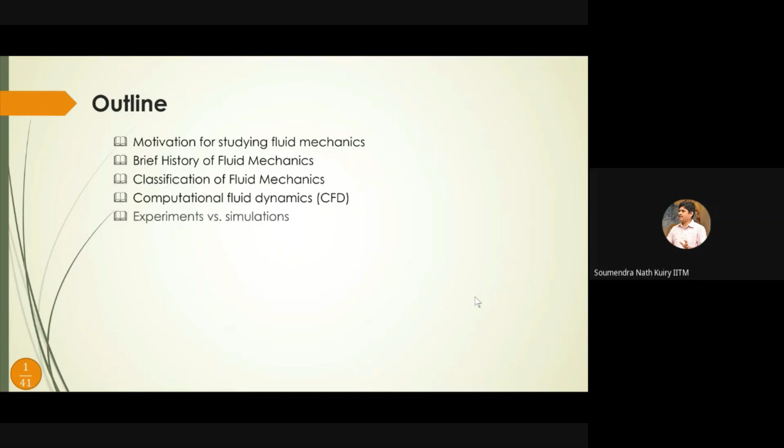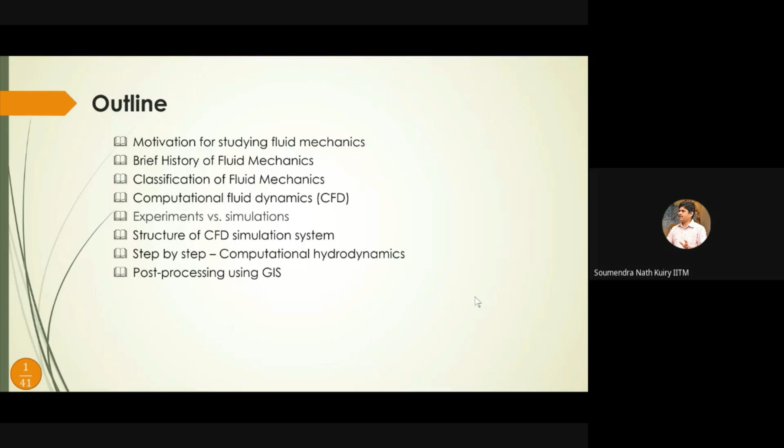So now the brief outline of the topic. I'll go for very basic things: why you should learn fluid mechanics, then what is the history of fluid mechanics, then what is the classification of fluid mechanics, then what is computational fluid dynamics, that means solving fluid mechanics problems with the help of a computer. Then I'll compare experiments versus simulations. Then what is the structure of a CFD simulation system. Then I will try to explain step by step the procedure for computational hydrodynamics, because CFD is a term more suitable for mechanical engineering and aerospace engineering. I think in our case, in civil engineering or hydraulics, it can be called computational hydrodynamics or just hydrodynamics. Then post-processing using GIS just to visualize and analyze the results.

So now, what is the motivation for studying fluid mechanics? I hope all of you have gone through a fluid mechanics course at your BTech level, and some of you have gone through an advanced course during your master's degree. Fluid mechanics is omnipresent, meaning this subject is available in aerodynamics, bioengineering, mechanical systems like combustion, energy generation, geology, hydraulics and hydrology, meteorology, ocean and coastal engineering, water resources engineering, and numerous other examples. In my talk, I will try to cover hydraulics, hydrology, meteorology, and ocean and coastal engineering.

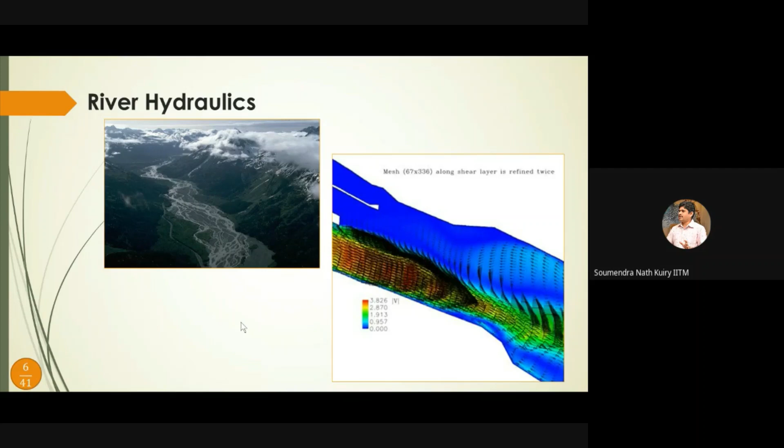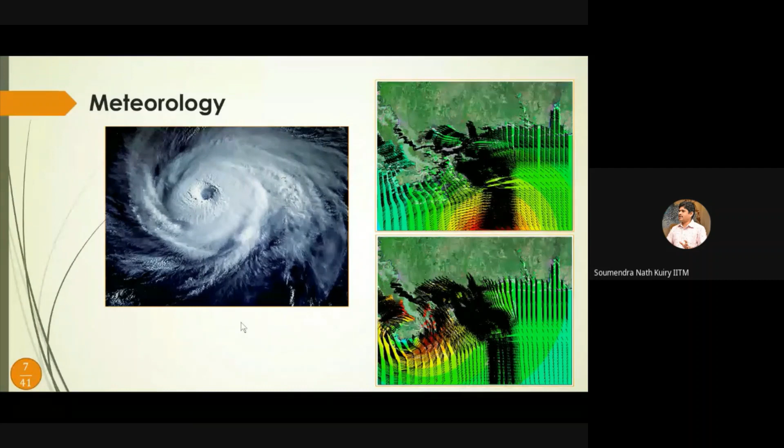So in case of river hydraulics, we focus on simulating flow, it may be in a river system or stream system, or flow in an open channel or any other channel, it can even be lab flume flow. Then in case of meteorology, we can start from atmospheric modeling, then go for rainfall modeling, then rainfall-runoff modeling or hydrologic modeling, then hydraulic modeling, and then hydrodynamic modeling, that means the ocean side. Of course it can also be tsunami simulation.

So now, out of this entire fluid mechanics field, in civil engineering we deal with liquid only, because fluid means liquid, gas and plasma. We focus on liquid flow, and that too water. So fluid mechanics can broadly be classified into two groups: hydrodynamics and gas dynamics. Okay, let me give you the pointer.

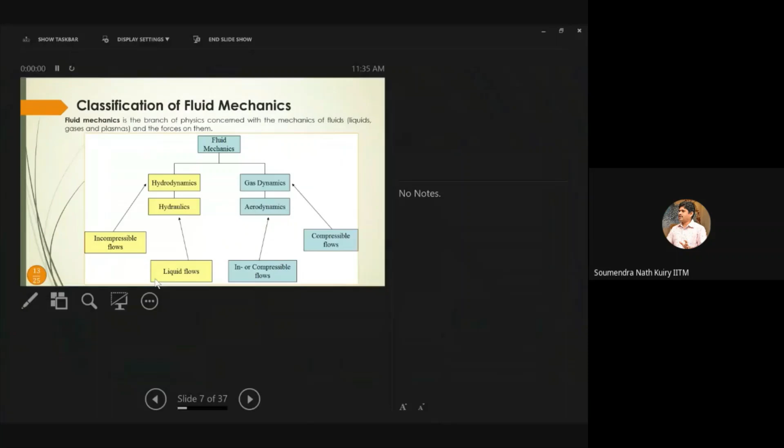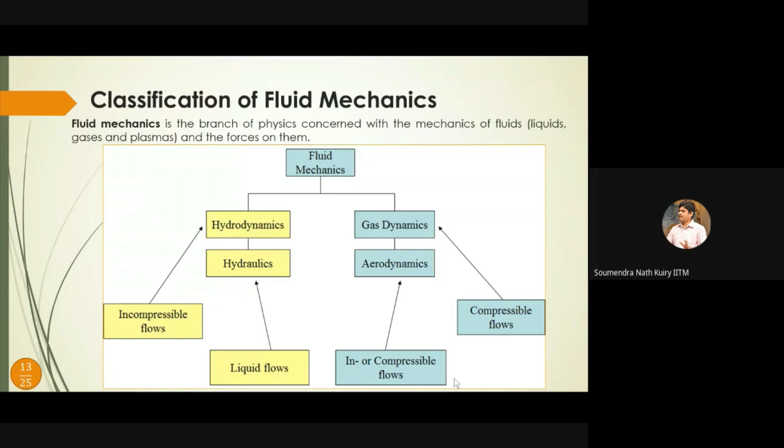So in hydrodynamics, it is like hydraulics and it is incompressible flow. In case of gas dynamics, it is aerodynamics, which can be incompressible or compressible flow. Now, out of that, we will focus on hydrodynamics.

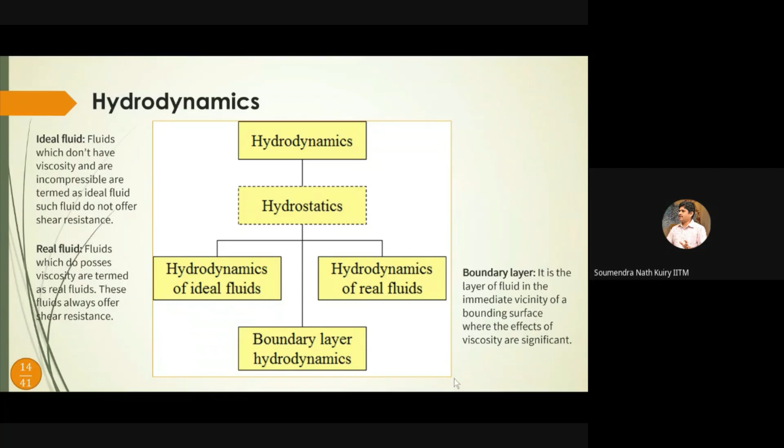In hydrodynamics, one aspect is hydrostatics, that means when the fluid is not moving, and then we can discuss hydrodynamics for ideal fluids and real fluids. There is one more topic which is very important, boundary layer hydrodynamics. So we have fluid, out of fluid we are talking about liquid. Then we can discuss hydrostatics and hydrodynamics of ideal and real fluids. Boundary layer is important in civil engineering, but it is very, very important in aerospace and mechanical engineering.

Now, when we talk about numerical modeling or modeling of any fluid flow, what should be the approach? There are three approaches: experimental study, theoretical study, and computational study. Experimental hydraulics, if you look at the early days, maybe before the 80s, mostly we were relying on experimental hydraulics. Of course, theoretical study has been developing since long back, but there is huge development when computers came into this area, and many numerical schemes were developed. Now we can solve fluid mechanics problems with the help of computational methods.

So in earlier days, we used to prepare a model, that means a replica of a prototype, and then we used to study it, and whatever results we got from that dimensional and model analysis, we would go back to the prototype system so that we could understand the prototype.

But nowadays, for many fluid flow situations, we can use numerical models. It can be 3D, 2D, or 1D. And it can be for different types of flow regimes, like subcritical flow, supercritical flow, or transcritical flow. Transcritical means the flow can be mixed, both subcritical and supercritical can be there.

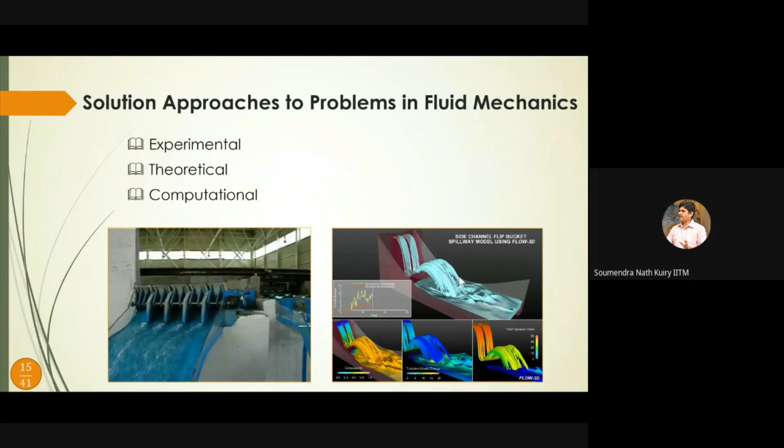Now, if we want to focus on computational fluid dynamics, I'm trying to merge slowly with hydrodynamics. So I'll start from computational fluid dynamics, then merge to hydrodynamics. So what are the basic concepts of computational fluid dynamics? CFD is a branch of fluid mechanics, and it uses numerical methods and algorithms to solve some fluid related problems.

So what we do is, whatever numerical methods are there, we use a computer to solve the fluid flow problems numerically. Now the term simulation is used to indicate that we use the computer to solve numerically the laws that govern the movement of fluids. I hope all of you know the laws like conservation of mass, momentum, and energy. So all these equations we solve for simulating fluid flow problems.

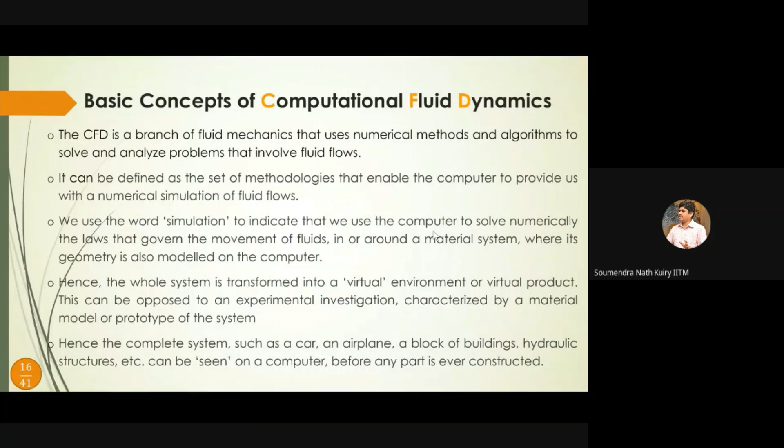That means the whole system is transformed into a virtual environment, that means we conduct numerical experiments in a computer instead of in a physical setup.

Now, what are the ideas behind numerical methods? When we talk about any physical process, whether it is flow in a channel, or a dam break flow, or tsunami wave propagation, whatever it be, every physical process follows some set of rules. These rules may be defined by a set of mathematical equations. These equations are generally differential equations, and most of the time these equations are highly nonlinear, so analytical or exact solutions may not be possible.

This is why we use numerical methods to solve these equations approximately. Please remember, when we use numerical methods, we solve the equations approximately. So rules are there, all the physical processes follow certain rules. We are defining the rules with the help of mathematical equations. These equations are partial differential equations, and they are solved with the help of numerical methods in a computer.

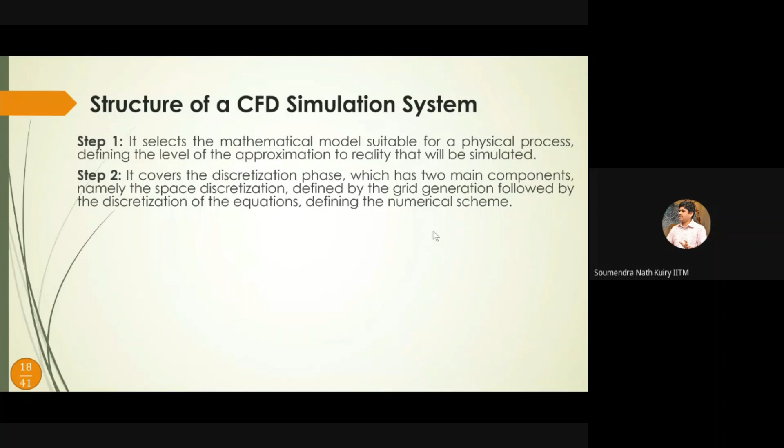When we talk about, let's say, flow, like river flow, that means there is a river bed and water is flowing. So at least one medium is there, that is a river bed. Now in reality, this river bed is a continuous surface. Now the computer will not understand it directly. So we try to define this bed or river topography by some points. That means the points should be described by X, Y, and Z. That means XY coordinate and what is the elevation with respect to datum.

Now, if we supply so many points so that the entire geometry can be defined, then it is called space discretization. So this space discretization, that means to represent the space with the help of some finite number of points, we call it grids. When we connect these points, they are not arbitrary. Of course, the points will be connected with some sequence. Then we define a grid. Digital elevation model - this will represent a regular grid. Okay, so in the first step, we discretize the space.

And in the second step, we discretize the equations, because they are partial differential equations. So we cannot solve them directly. So we take the help of numerical methods to transform the partial differential equations into difference equations. That means in the algebraic form of the equations. Now, once it is in algebraic form, that means your operations are very simple, like addition, subtraction, division. So computer can do it very easily. So we have space discretization, then we have discretization of the equations. That is step 2.

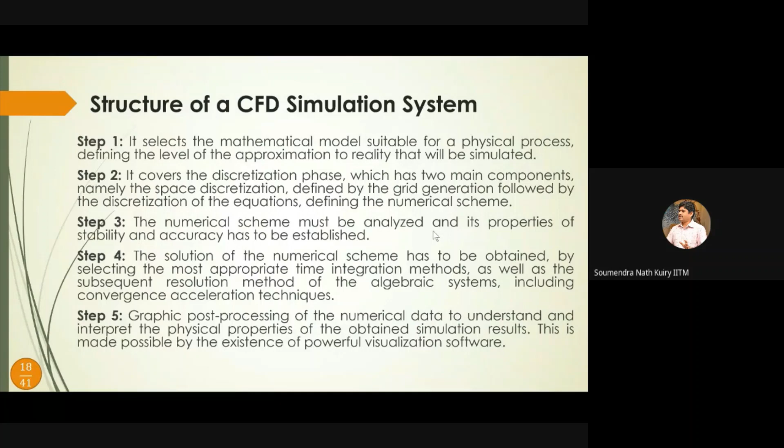Once you get the results, then you can, say you are using the numerical model, you are getting the results, then in step 5, we should go for graphic post-processing of the results. This we can do with the help of many graphical tools. Sometimes some models have an inbuilt processor - that means you can process the results and visualize. Sometimes they may not be very effective, so you have to go for some standalone tools. But for civil engineering problems or in our area, GIS can be a very good option.

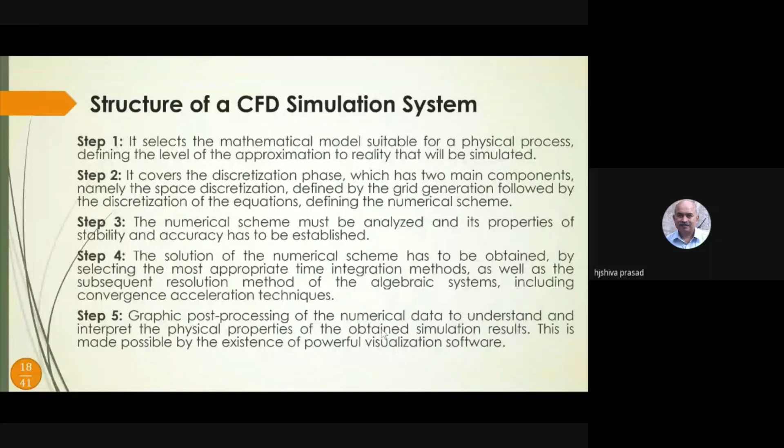Okay, these are the 5 steps. Just I would like to take a feedback. Professor Shiva, everything is going fine? Yes, sir. Yes, sir. It's fine. Oh, okay. Okay.

Now, so I was talking about different steps. Now, I'm trying to summarize it here. What should be the CFD structure? So, first step is we have a real world. That means there is a process, what you would like to solve. Then you are approximating the process so that you can describe it with the help of some mathematical equations.

That will be like a mathematical model. That is step 2. Now, this mathematical model will be based on partial differential equations. So we will go for the discretization phase.

That will be done in 2 steps. Step 1, discretization of the space, that means grid generation. Then discretization of the model equation, that is based on numerical scheme.

Once this step is done, then we can go to the next step. That means you choose the method, the numerical scheme, and then there are some checks like consistency, stability, and accuracy. Then we can solve the resulting equation.

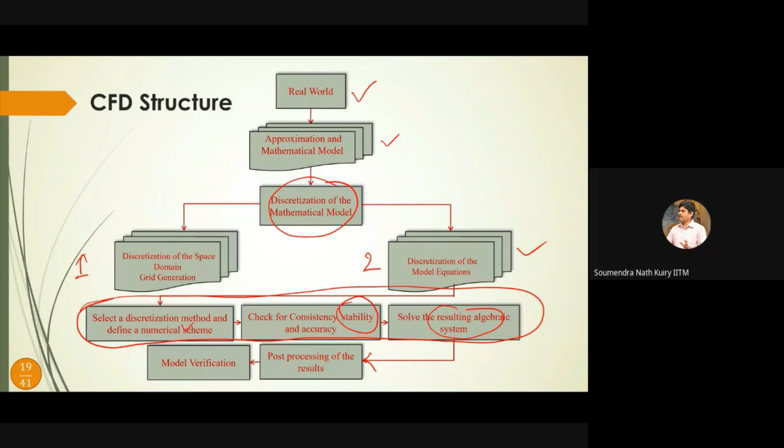Maybe in case of a readily available model, these steps are already done, so you can come to post-processing and model verification. But when you are generating some results, you should be careful about the model stability. Okay, I'll discuss it.

So what I was telling is, with the help of a mathematical model, you can do numerical experiments. You don't need physical experiments.

Let's say there is a plan to send a rocket to Mars. So we can do some limited experiments, so we have to rely heavily on simulations.

But there are certain cases where we rely more on experiments because our simulation system is not that much smart. Like in our case, if you are interested in turbulence, of course turbulent models are there, but most of them are very approximate. But if you are interested in the deep insight of turbulence, it's very difficult to simulate. Maybe you have to do a lot of experiments.

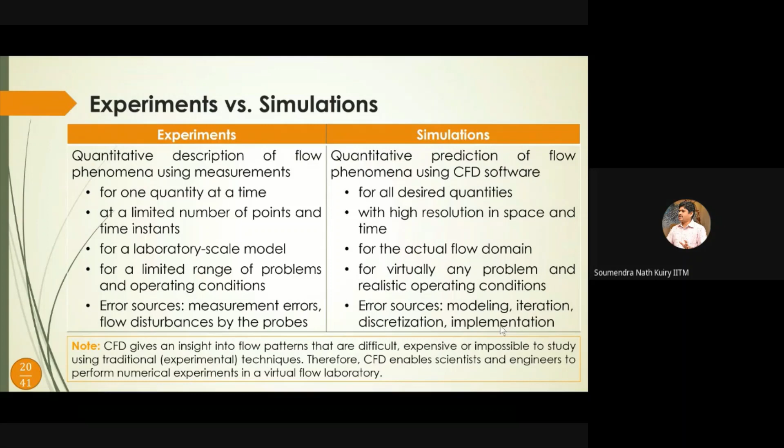Okay, so let us go to the next slide. I think this slide is not so important.

Now, what are the drawbacks of simulations? We are telling that we can do simulations for many fluid flow problems, but the fact is the results of a CFD simulation are never 100% reliable. And there are many reasons.

Number one, the input data may involve too much guessing or imprecision. Like in our civil engineering system, when we collect data, there can be a lot of imprecision. That means we introduce too much error.

Then the mathematical model of the problem at hand may be inadequate. That means for certain processes, whatever mathematical model we are using may not be good enough, or it is not good enough to explain the actual physical process.

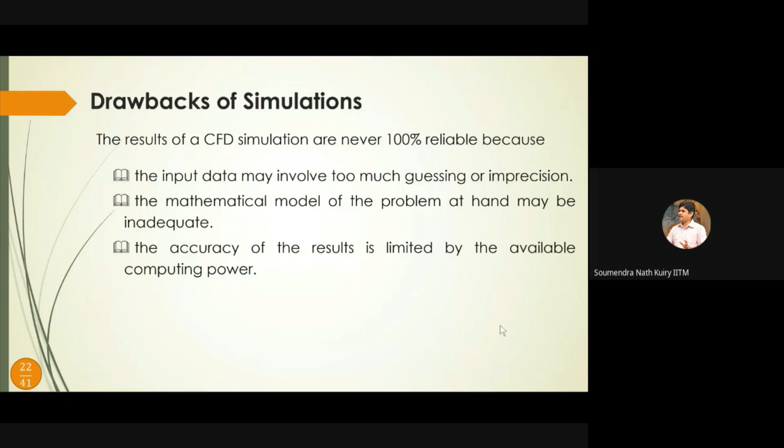The accuracy of results is limited by available computing power. For example, if we want to do urban flood modeling for a big city like Chennai or Bangalore, or any city in Uttarakhand, at a large scale with high resolution, we'd find that despite advances in computing, we are still limited. We may need a supercomputer, but we cannot afford it all the time. So we go for coarse resolution studies instead, sacrificing some accuracy. These are the drawbacks of simulation systems.

Now we have the basic idea of the steps for a CFD system, the approaches we take, and the limitations and advantages. Now we want to implement it for surface flow simulation. So what are the steps?

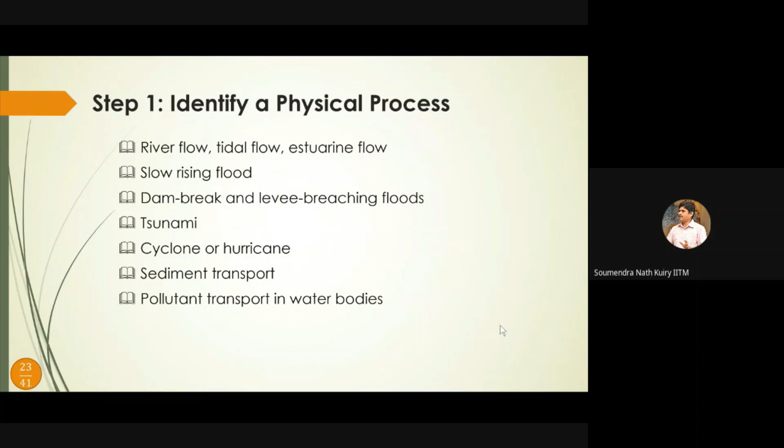Step one, if you remember, I was talking about five steps. Step one is to identify a physical process, meaning what process you would like to model. It can be river flow, slow rising flood, or dam break flood. Please remember, natural floods are generally slow rising, whereas dam break, levee breaching, and flash floods are different, so the same model may not work. Then we have tsunami, cyclone, sediment transport, and pollutant transport. Here I have focused on civil engineering related problems. You pick one problem and then move to the next step.

In our case, for hydraulics and water resources systems, most of the time the physical process can be defined by shallow water equations. Shallow water equations are the depth-averaged version of 3D Navier-Stokes equations. I hope all of you know the Navier-Stokes equations - we have a continuity equation and momentum equations in 3 dimensions, with many terms. But when we apply it in our case, we assume that in the vertical direction, the change in variables is insignificant, and we fall back to a 2-dimensional system. So we focus on 2-dimensional depth-averaged shallow water equations.

Of course, we can also go for a 1D aspect. Some people use 3-dimensional models too - if you use Flow 3D software, that's for a 3D system. We have Delft 3D software, also for 3D systems. We have Mike 3, also for 3D systems. Now with 1D, 2D, and 3D, there are a few things you have to remember about when to use which one.

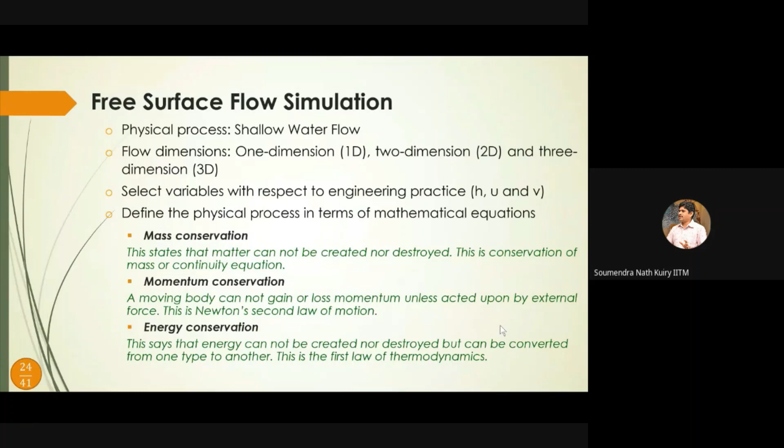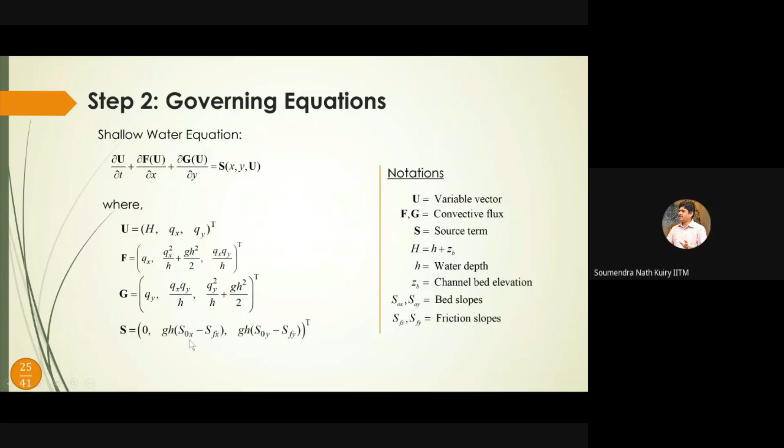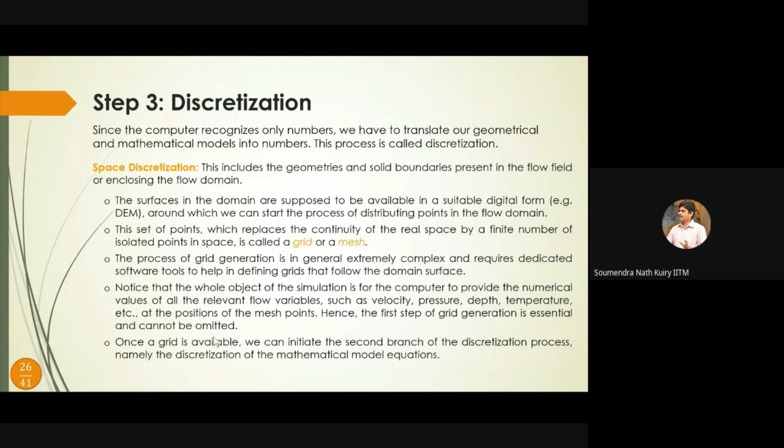Before I go to the space discretization, Professor Shiva, should I address some questions from the audience? Because at the end there will be too many questions.

Someone, can you please respond? Can you hear me? Yes, sir. Okay, so do you have any specific questions till now, or do you want to discuss at the end? At the end, sir. At the end, okay, thanks, towards the end, okay. So now can you see my screen? Yes, yes, yes.

Okay, now space discretization. We can go for 1D, 2D, and 3D modeling. Space discretization means we have to generate a grid or mesh. In case of space discretization, let's say if it is 1D, it can be a river within the bank, so we define cross sections. The cross section can look something like this, water can be here.

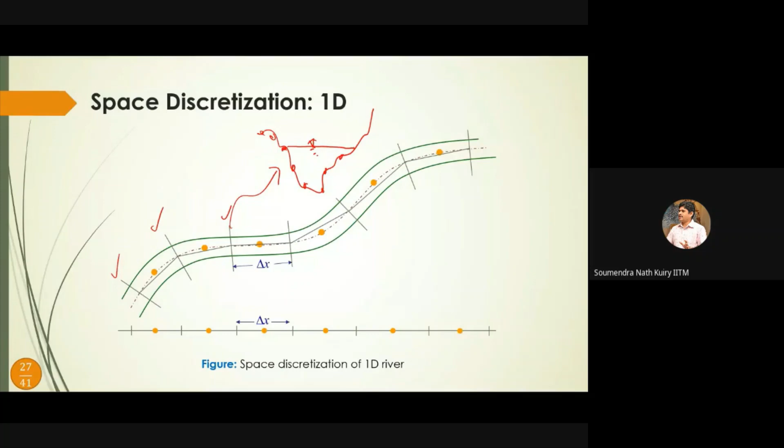We measure this geometry with the help of points, so there can be one coordinate system. Let's say this is my reference X and Z. So we know the X and Z of all the points. This data we get from field survey.

So we discretize it like this, and since rivers can have bends, but when you solve it in 1D form, it's as if we are opening the ribbon and making it straight, so we'll get this kind of system, and we'll solve the equations at each nodal point. So for 1D it is very simple: just take cross sections, and take more cross sectional surveys where there is a bend or where the flow dynamics is strong.

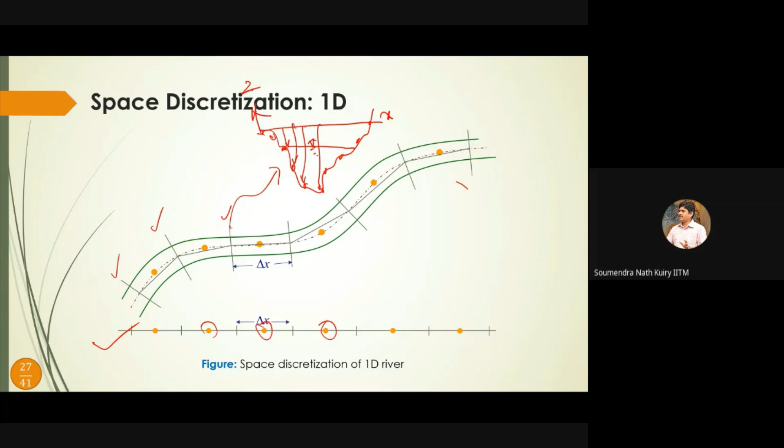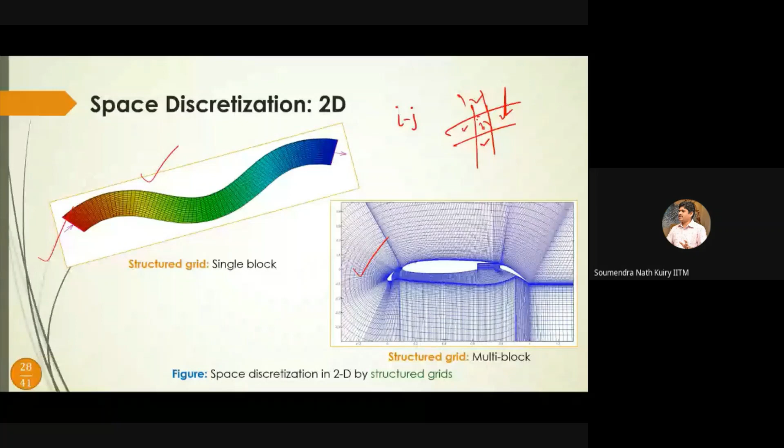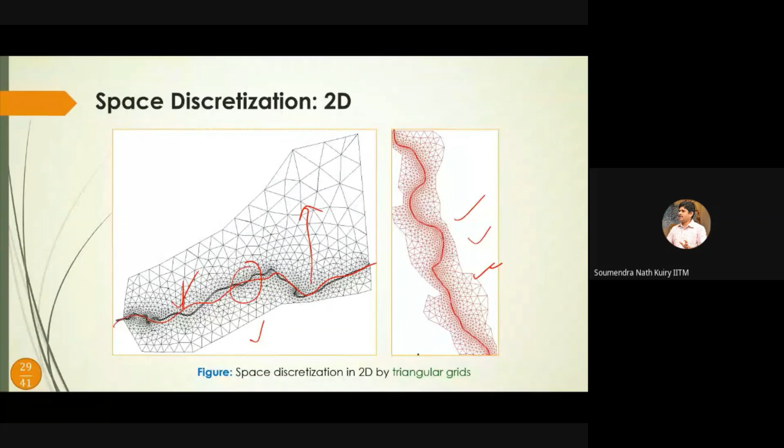Now there can be another type of grid called triangular grid or unstructured grid. I have solved this for Thames River and Severn River, both in UK. In case of triangular grid, you can define the geometry in a flexible way. That means where you need high resolution, you can use more grids. Like the river geometry, I need more detail, so we have used finer triangles here, and away from the system, we have coarse grid. So in case of unstructured grid, you have the flexibility to optimize the number of grids, and at the same time define the geometry in a better way.

Once the space is discretized, next is discretization of model equations. There are many numerical methods, starting with method of characteristics and finite difference method. These are the two basic methods. If you are interested in numerical modeling, all of you should learn method of characteristics and finite difference method. I think all of you have gone through finite difference method, but many of us don't read method of characteristics. But in any model, when we define boundary conditions, we still rely on method of characteristics. There is one very good book for method of characteristics and finite difference method for civil engineering water flow.

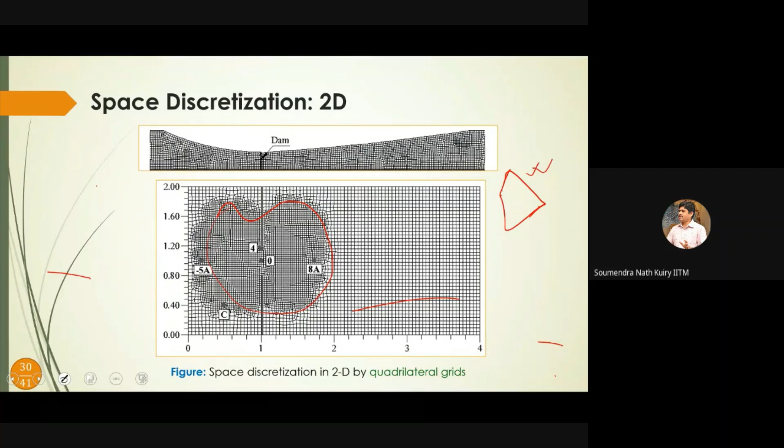That book is called Computational Fluid Dynamics. Please note this book, I like it very much. It's by Abbott and Basco. This is a very old book, maybe you will get it in the library.

Then we have finite element method, but in our case, for fluid flow problems like water flow, I think finite volume method is much better than finite element method. The reason is simple: in finite volume method, the variables are conserved locally, in each grid or cell, whereas in finite element method, these are conserved globally, and this has some implication on the overall accuracy.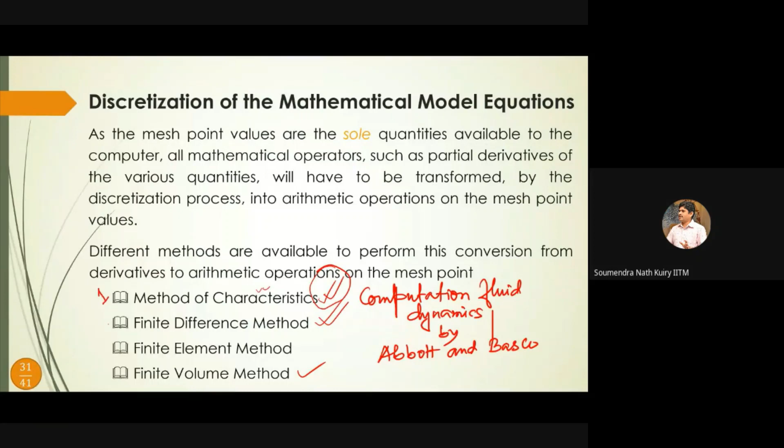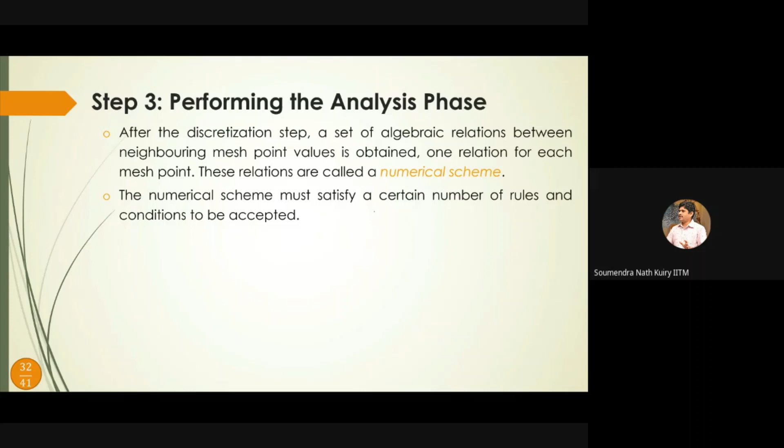So if you want to learn numerical methods, please focus on these three. Now, once all these things are there, those who are simply model users can also follow from here: Step 3, performing the analysis phase. Whenever we use numerical models, it must satisfy a certain number of rules and conditions, and these rules are used to avoid generating errors from the numerical scheme.

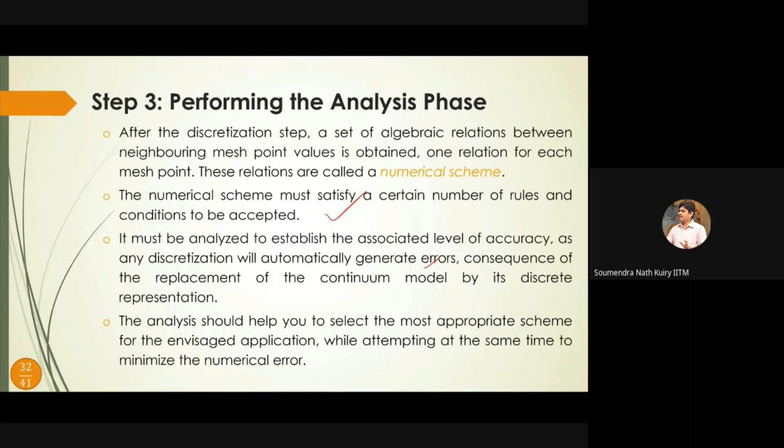If you go through this kind of analysis, it will help you select the most appropriate scheme. For a typical flow situation, we need certain types of models. If it is supercritical flow, you need a special kind of model, because we need a special numerical scheme to capture the fast flowing flow phenomena. So we have to analyze the numerical scheme for its application and accuracy.

Now, certain questions on numerical discretization: what conditions are required to be imposed on a numerical scheme to obtain an acceptable approximation to the differential problem? When we define partial differential equations, we cannot define all the physical processes, so we approximate. We should know what conditions should be applied so that we can get an acceptable approximation.

Then, what are the stability limits of a numerical scheme? There are some stability criteria, I will come to this point later. When using a model, there should be a relationship between your grid size and time step size. If you have ever used a mathematical model, you generate a grid and then assign time step size. If you assign a large time step size, either the model will stop or you won't get accurate results because it violates the stability limits.

Then, what is the level of accuracy of a numerical solution? It depends on the type of problem. In civil engineering problems like flood and tide, our expectation is a little less because too many approximations and uncertainties are there. But in case of a closed system where the geometry and everything is well defined, your expectation can be very high. So you have to define the level of accuracy.

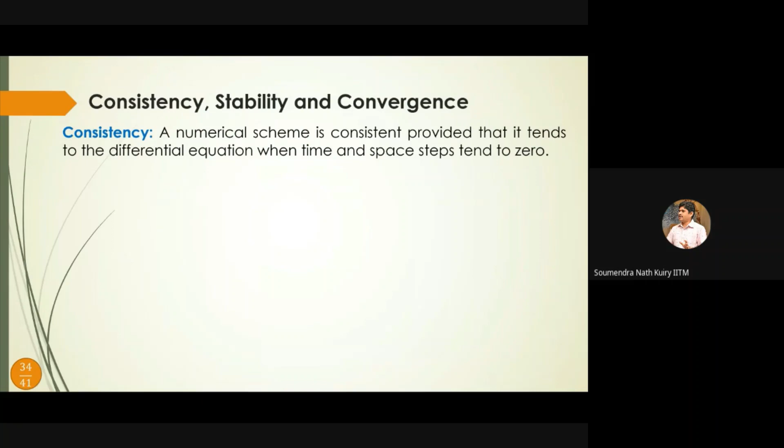Then stability. Since we are discretizing from partial differential equation to algebraic equation, we are introducing some error, the truncation error term, but this error should remain bounded. That means it should not grow when the number of time steps tends to infinity. For certain cases, there is a difference between observed and simulated data, but this difference should not increase with time. If you use small time step size, you get one type of error; if you use a larger time step size, you get more error, then there is a problem.

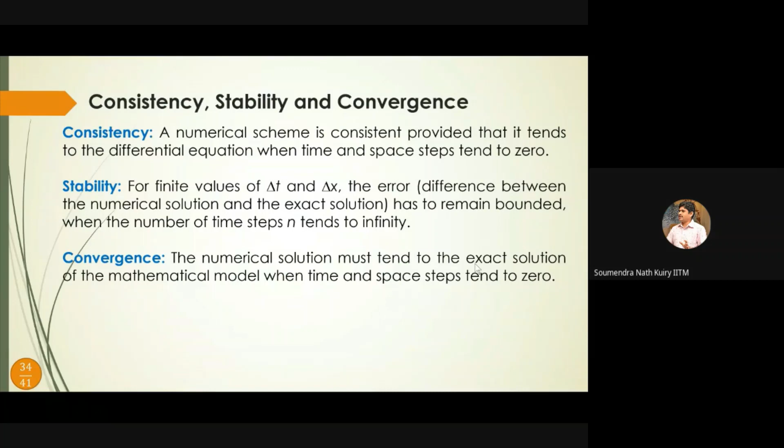Now, convergence means the numerical solution must tend to the exact solution. That is our target, right? Whenever we are solving an equation, we should get the solution close to the exact solution. So that is called convergence, and we have some convergence criteria.

So for satisfying stability and convergence criteria, there is a theorem we call the equivalence theorem of Lax. For a well-posed initial value problem and consistent discretization, meaning your other aspects are fine, stability is the necessary and sufficient condition for convergence.

Now let me briefly describe what is stability. Let's say if you are using HEC-RAS model with an explicit scheme, and using regular grids where delta x equals delta y, then this delta x, delta y along with the velocity and time step size will form one criteria.

When you are solving a numerical model, some information is propagating from one computational cell to the other. We go from delta t time step to the next, that is t plus delta t. During this time interval, the information should not cross more than the neighboring cell. That is the actual criteria.

If your delta t size is too large, this information can cross into the neighboring cell. This sometimes happens when you use a larger delta t, and sometimes it happens when you are using a small delta x, delta y size along with a very high delta t value.

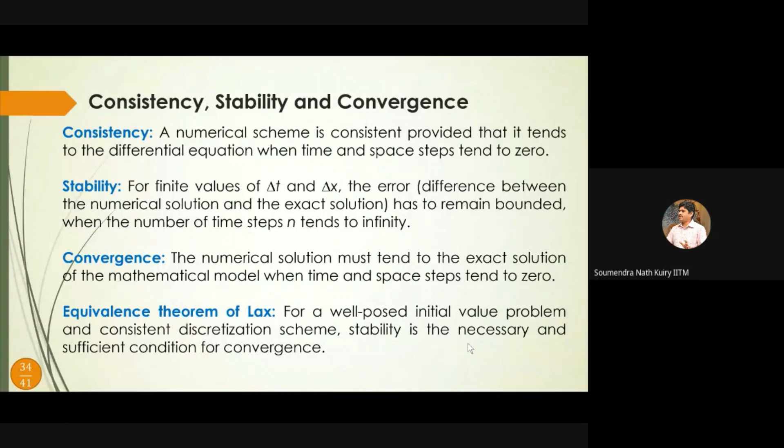Why? For certain situations, like when you are in predictive mode, we don't have any reference solution to compare against. At most, we have past observed data and can validate, but that only gives a calibrated model; it cannot ensure the same level of accuracy for future flow scenarios. In that case, you should go for a convergence test. If you are sure with your convergence test and using calibrated parameters from historical events, at least you can say you are not making mistakes as far as numerical simulation is concerned.

Now, when you have developed a model and you want to use it, you need some initial and boundary conditions.

Initial condition means, let's say for a river flow, we should know the flow condition at t equal to 0, from the time we want to start simulating. That means you should know what is the depth and velocity.

You can get this initial condition in two ways. One is cold start: at t equal to 0, you assign the boundary conditions and simulate for a long time, since we use unsteady models for everything nowadays. You give some observation points and look at the variables as time series. After a certain time, the variables are not changing, meaning you have got the steady condition for t equal to 0.

That value you should use for your unsteady simulation. This is called cold start. Another method is hot start, where you were simulating for a certain time, stopped and saved the results. You can use those results and continue again with respect to time.

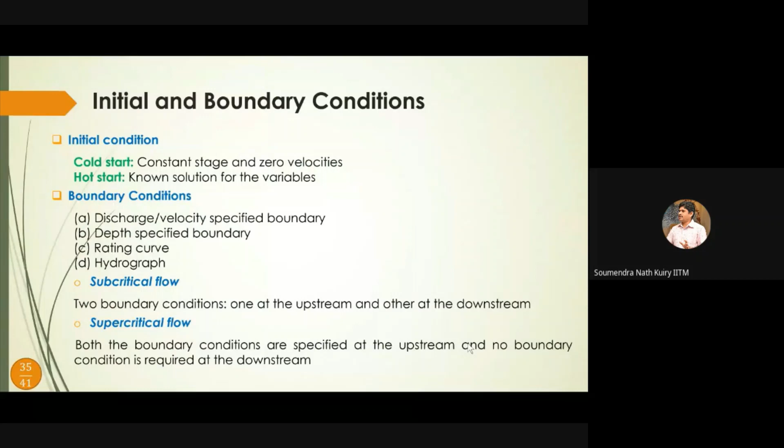Now let's say you have got the results. This step is very much required for research scholars using numerical models. When we simulate and write a journal paper, we should follow a certain format, and these three steps are very useful.

We are often confused between verification and validation. Please remember they are two different terms, not the same. And then we have application.

So if you are simulating some flow event and preparing a note, you should choose certain problems so that you can verify, validate, and then apply. So what is verification? Verification is nothing but measuring the mathematical correctness of a model.

How do you do that? You choose some analytical problem which has an analytical or exact solution. You solve that type of problem and compare. You should get exactly the same results, meaning your model is verified. This is also required for an already available model, just to make sure you are applying it properly.

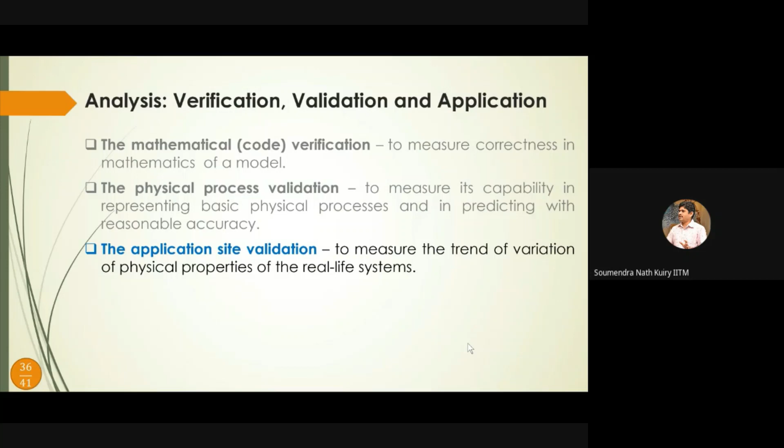Once these are done, you can apply the model to solve a real problem. But remember, you should not verify and validate a model for one flow situation and then apply it to a completely different problem. That is not acceptable. You should verify and validate for a similar situation, or the same site, or similar flow conditions. Only then can you use the verified, validated model to solve a real-life problem.

These three steps, whatever I have discussed, I have explained here. So now, after doing all these things, you have the results in your hand. Now you want to post-process.

For pre-processing and post-processing, if you look at models like HEC-RAS, MIKE, Telemac, BASEMENT, whatever models you say, or CCHE, 1D, 2D, outside the model there are two things: pre-processing and post-processing. Quite often you can do the pre-processing in the available model itself, but your digital elevation model or some input requires some pre-processing, and that can be done in GIS software.

Nowadays freely available GIS software is there. I like QGIS. QGIS is free, and this is quite good. So you can use it for pre and post processing.

Then mesh generation. If you are using HEC-RAS, then you don't need a very sophisticated mesh generation tool. The HEC-RAS model itself has a mesh generation tool, like regular grid, then polygon, all these things are there. Even in MIKE also it is there.

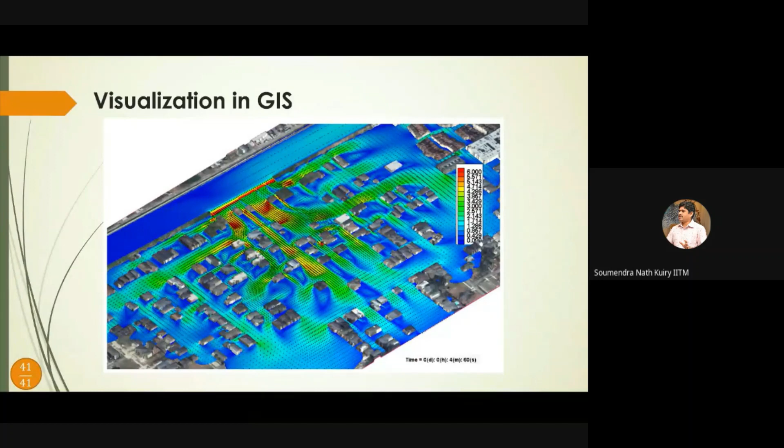Like here I have something, this is from one USGS site. This is for a levee breaching flow, and there is one urban area, and suddenly the levee is breaching and flooding the urban area. This result we prepared in GIS software. So if you look here, look how nicely we can visualize the results.

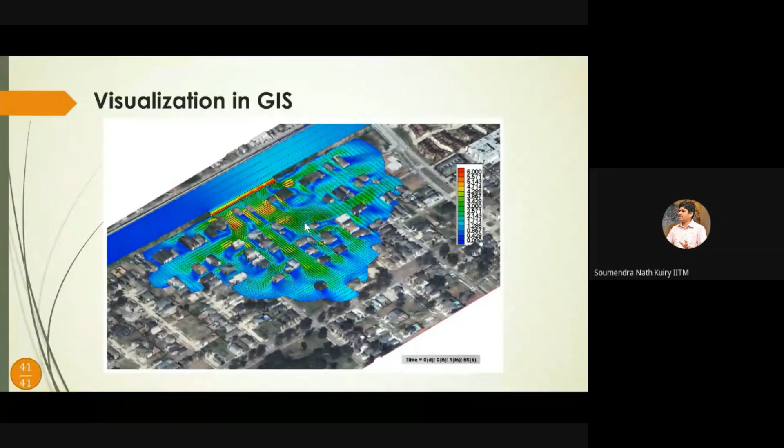So I don't have the GIS here, but you can zoom in and go there, and you can see how it is, means inundating. Okay, so this is the visualization tool.

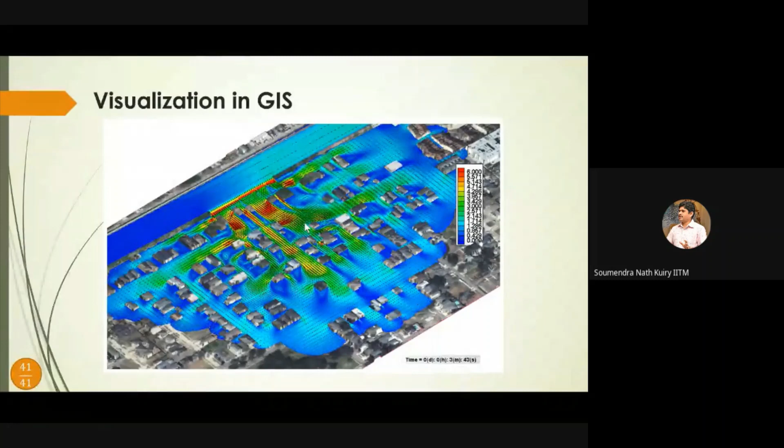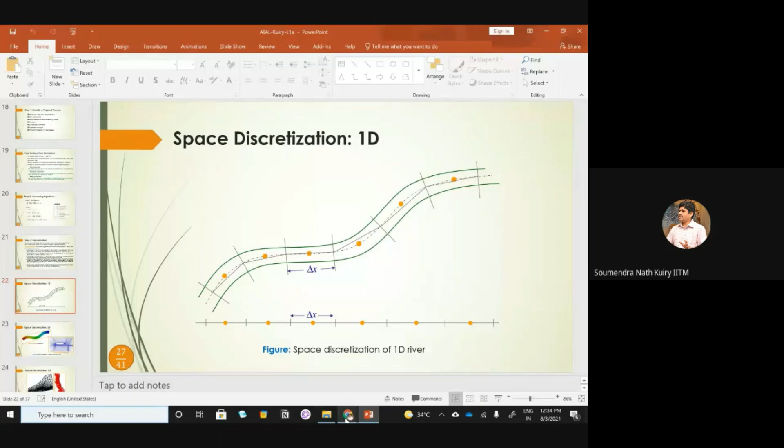If the time permits, beyond this first one, I have some other application. I'll show it to you.

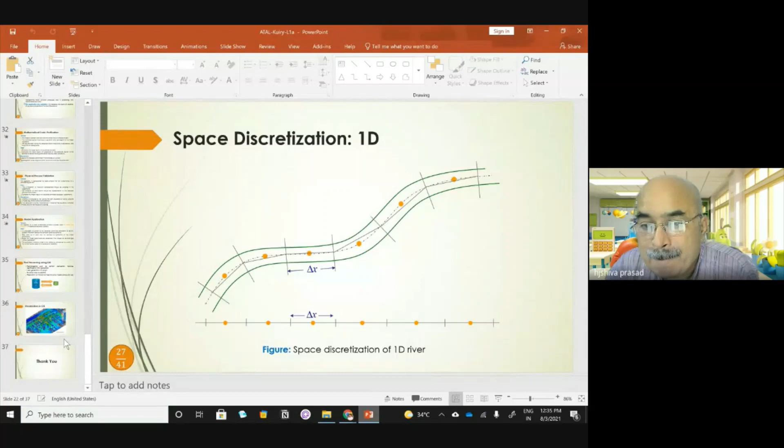Just a moment, let me share one window here. Mr. Ashutosh Rath, are you here? You can unmute yourself. Yes, sir, you can just get the clarification. What do you mean by multiple grid?

Yeah sir, in a 2D flow you want to generate some grids, so how can you do that one, sir? Now suppose meandering is occurring in a particular river and you want to make the grid generation, then what to do, sir? How can we proceed, sir?

Okay, now there are a few things. If you are using some available software like HEC-RAS is there, right? MIKE, I think most of the Indians are using HEC-RAS and MIKE, so they have their own mesh generation tool. So let's say if we have a river like this, which can be like this.

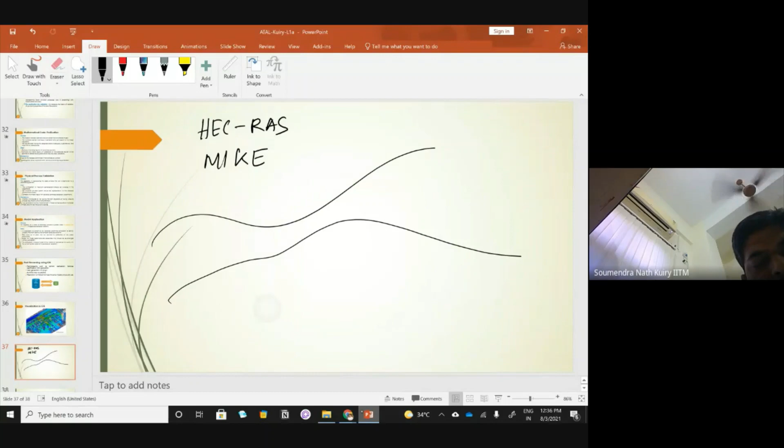Don't go for DEM, which means regular grid. In HEC-RAS, we generally use DEM, but HEC-RAS can also solve on a triangular polygonal grid, so you have to go for an unstructured grid.

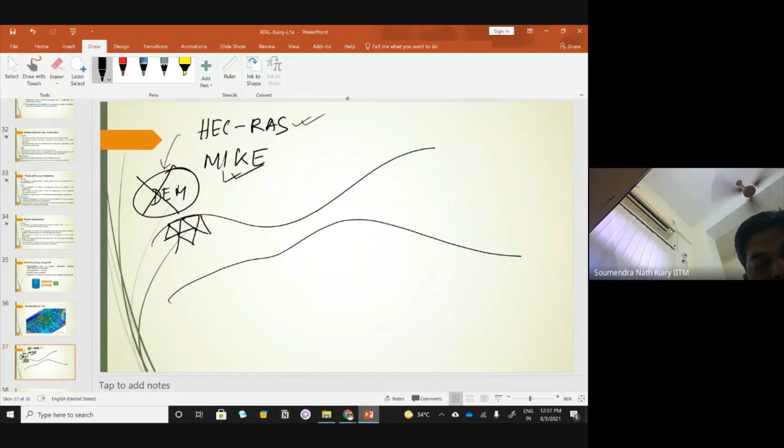In Mike, unstructured grids are very much available. You go for a triangular grid using its grid generation tool, a mesh generation algorithm. You have to give the boundary, and if any structure is there, give that shape. Then it will generate the grid in the first pass, and in the next pass you can refine it at certain locations.

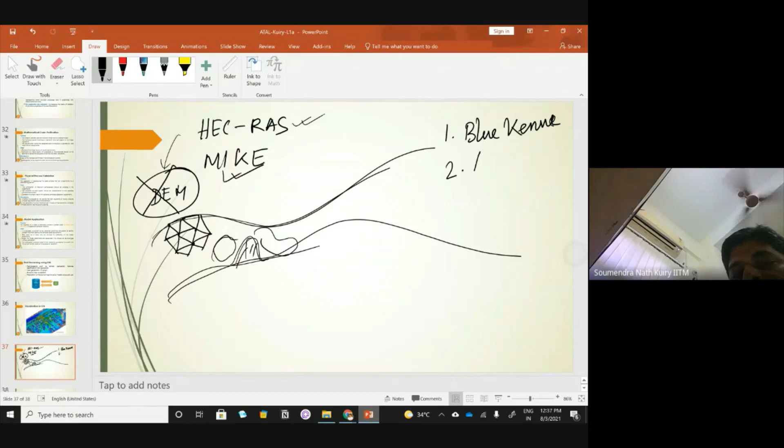So there is that option. But if you are developing a model and looking for a mesh generation tool, I'll suggest something. One is Blue Kenue, a very good mesh generation tool. You can use Blue Kenue, and for quadrilateral or other grids, you can use Automesh-2D. These are all freely available.

Okay sir, thank you sir. Okay, Vidya Priya, Dr. Vidya Priya, are you here?

First of all, regarding shallow water equations in 3D, please remember this: when we call it the shallow water equation, it is in 2D form.

If you want to apply it in 3D, that means we are solving the Navier-Stokes equations. So a 3D model should be used for localized flow, meaning you need very fine details of the flow structure for a limited area, because 3D means your grids will be in three directions, X, Y, Z, with one layer on top of another, so many layers will be there.

This is why, for example, if you have a spillway and want to see how the flow goes over it or what happens downstream, you can use 3D for that type of flow situation. Or let's say you have a levee structure and want to get the feel of the flow structure, then you can use a 3D model.

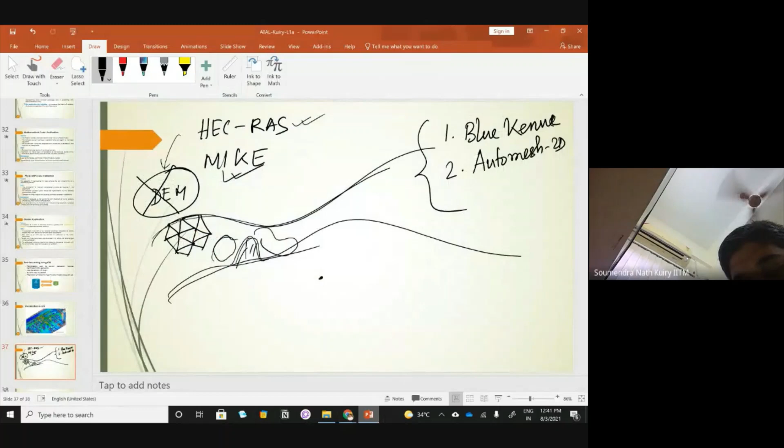If it is a shock capturing scheme, I hope you'll understand that term, a Riemann solver. If this solver is there, you can use it for supercritical flow. I think in Mike it is there, they are using a Roe scheme. That I know, but my student was telling me that in HEC-RAS also there is a shock capturing scheme. Please look for it.

Okay sir, who is your guide in Kharagpur? Professor Bhabagrahi Sahu. Oh okay, yes. Thank you, sir.

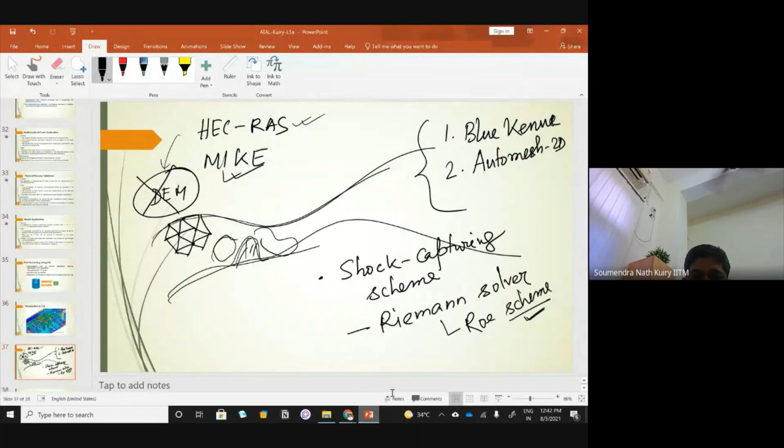Good afternoon, sir. This is Pradeep Hodlur from Chikkodi, Belgaum district of Karnataka. Sir, you were mentioning that certain fluid flow phenomena can be modeled and simulated, certain cannot. Could you please suggest some books covering these topics, or material where we can explore in detail, sir?

One book I wrote during the presentation is Computational Fluid Dynamics by Abbott and Basco. Have you written that down? Yes, sir, I've noted it down. And then I'm writing here. Thank you, sir.

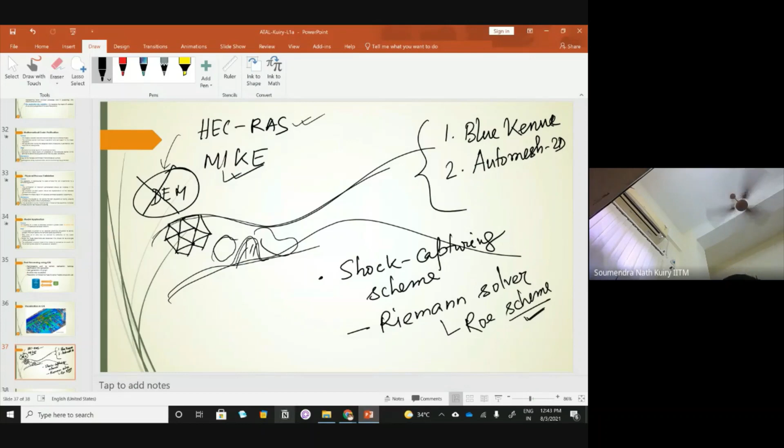Open Channel Flow by Hanif Chaudhry. This is a very good book, though I don't know the exact title, please look for this book somewhere. And Malalasekera, they have one book, most probably titled something like Finite Volume Method, I don't remember exactly. The spellings for these writers may be a little off, but if you put it in Google, you'll get it.

And then numerical methods.

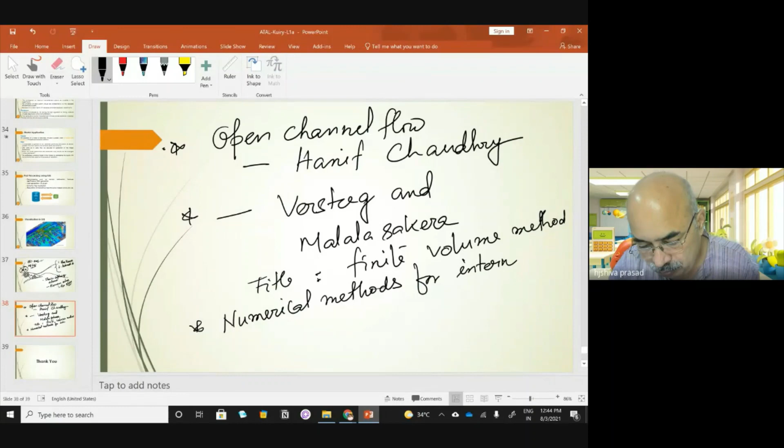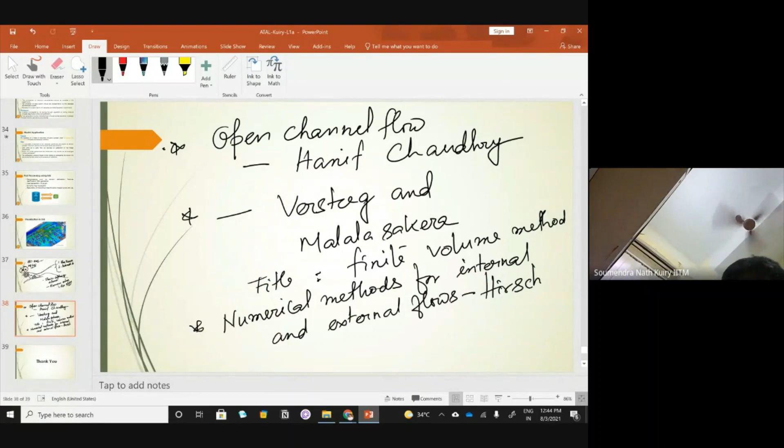These are some of the books, and there are many other books. If you want to know more, you can write me an email and I can update you.

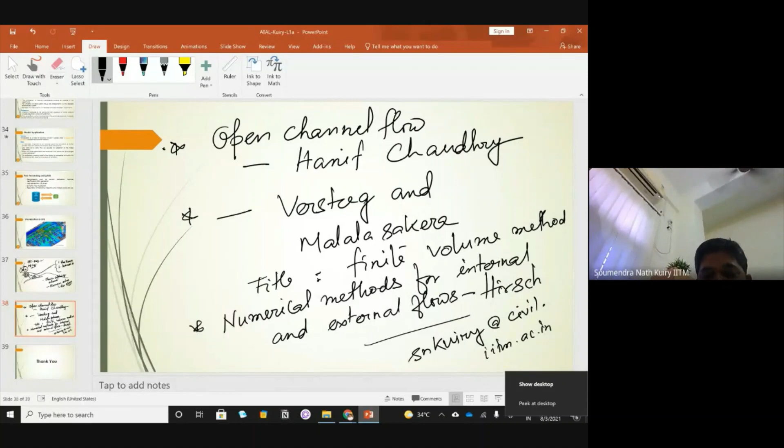If you look for all these books in Google, you can find them.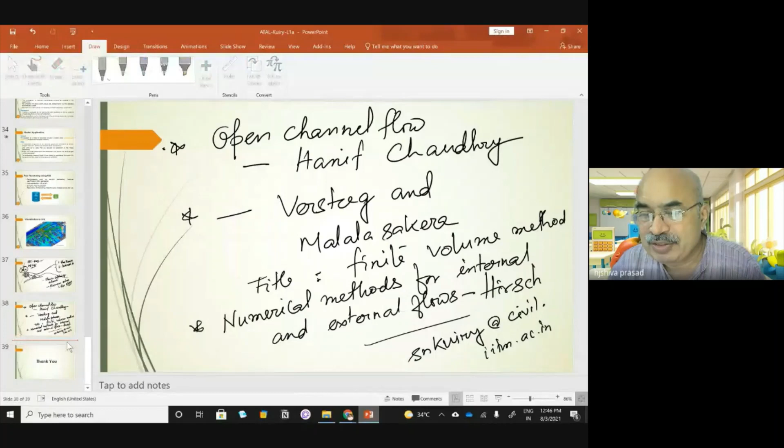Sir, now I'll describe this problem from two perspectives. If it is flood forecasting, I think 1 kilometer is too short a length. And the next thing is it all depends on many factors when we try to collect data.

Recently we are working on this in Kerala. There is one spillway system that's working properly, and 3 rivers are joining there, and they are very long rivers. So if we have very high resolution data, say every 100-meter interval, that's very good, but we cannot afford it.

So the best thing is, if your stretch is only 1 kilometer and money permits, and if the river is varying too much, then the interval should be 100 to 200 meters. But if it's not changing too much, you can increase the interval, there's no problem. And if it's a very long river, 500 meters should be okay.

I know one instance for the Ganga River where another group was simulating. They had data at 20-kilometer intervals because we cannot afford finer resolution. So what we do is take that cross-section data and go for other sources like SRTM, 2D data, and mix it together. By mixing that data from other sources, we can get a better geometry.